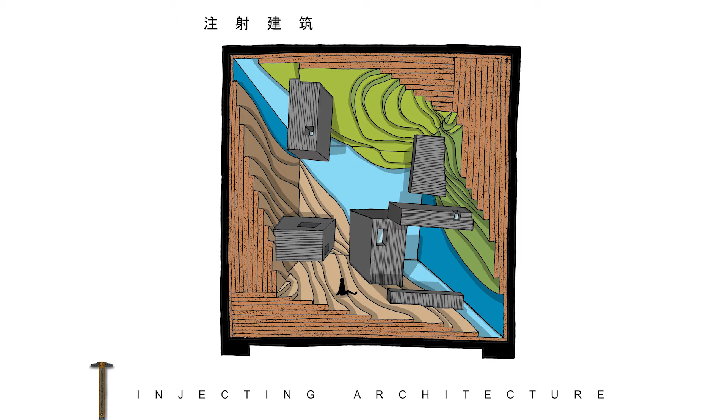This set of things - in fact a few universities are currently in talks with us to have this into their university courses as one of the modules. So I'll just run through it in a quick sense. I'm not trying to do a full 101 on injecting architecture now, just running through it so everyone gets a big picture of what we're going to talk about when we get to the project.

Looking at these two: one is a parasitic move whereby the fish and the isopod - the isopod is actually eating away the tongue of the fish, killing it in the process. And the rhino and the oxpecker - the oxpecker is actually cleaning up the hygiene of the rhino. So this moves from parasitism to symbiosis - that's the direction we're moving.

These are the methods of how forms are created - from birth, from surface, and project. These are quick slides because I won't go into detail.

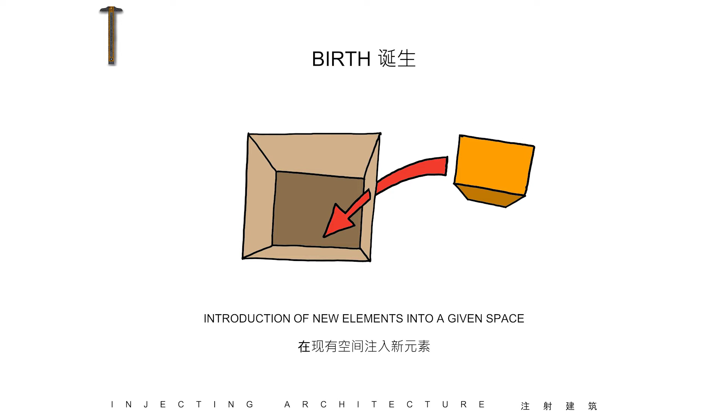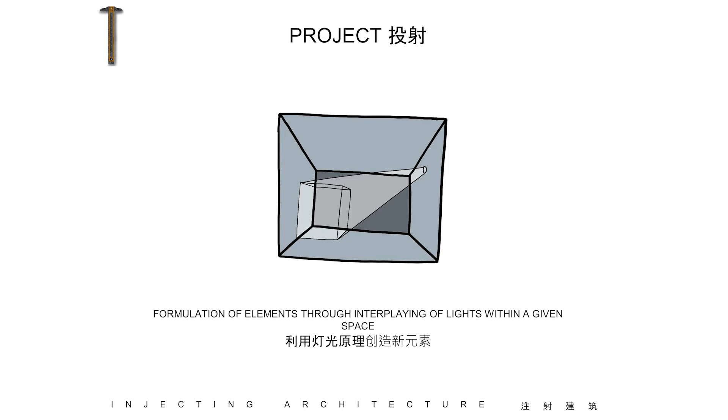Introduction of elements into a given space - that's giving birth, and then formulation of elements using existing surface within a given surface. These are all looking from an interior perspective, and of course the formulation of elements through interplay of lights within a given space.

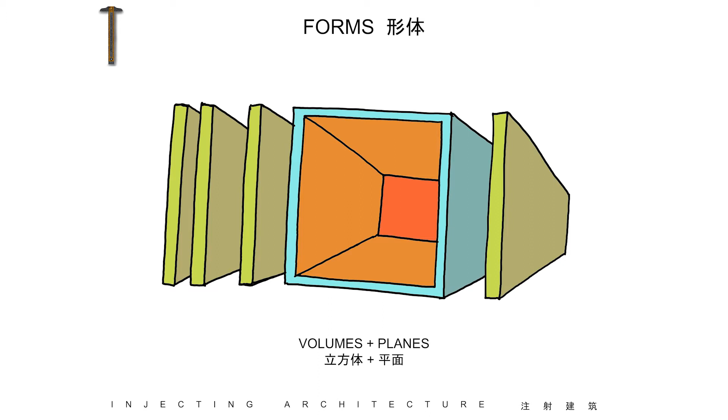These are the ones we're commonly exposed to: forms, volumes and planes, and these are different transparencies. I don't know whether this will bore the professionals, but I'm actually using students as the target since AYDA is for the youth, so do bear with me.

Then there are different kinds - intersection, adjacent, in series, stack, dissect, intertwine, and so on. These are all different methods and it's still expanding, and these are the types of injection methods.

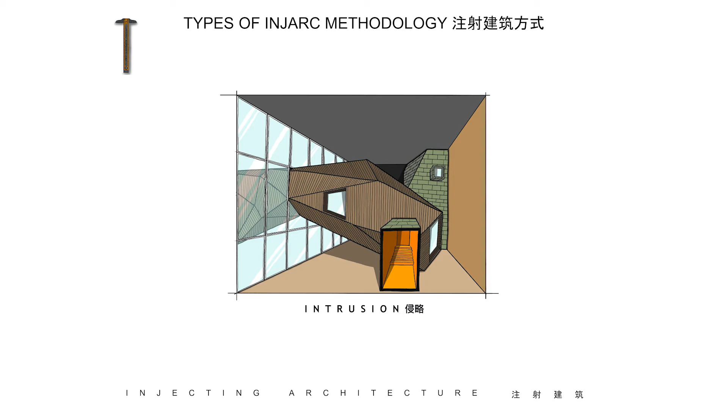Okay, through intrusion, through division, through complementary, through sculptural form, and through fragmentation, and so on. I'm going to the case study because I have very limited time here. Normally my lecture is 1.5 to 2 hours.

In traditional sense, when people look at exhibition design, they're looking at how you display certain things. In fact, even in interior design, a lot of us don't consider that as part of interior because it's more content generation. So these few years, we have been working with another listed company as our partner to try to change certain things in China. In this particular case, we are getting not just the exhibition work as a commission, we are getting the whole interior spaces, including the public spaces, the common spaces, so we integrate everything as one single unit, as one single thought process, rather than to just do them as individual segments.

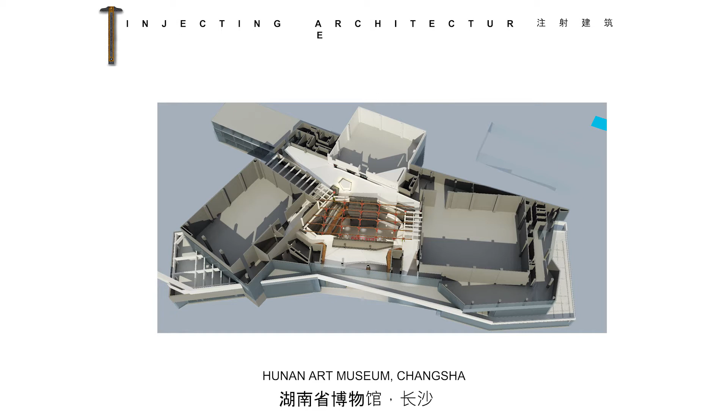So for this, in short, these are the cut-off plan. There are 4 stories to this, so this is just the ground floor. And we can see from the central atrium, those are the skylight area.

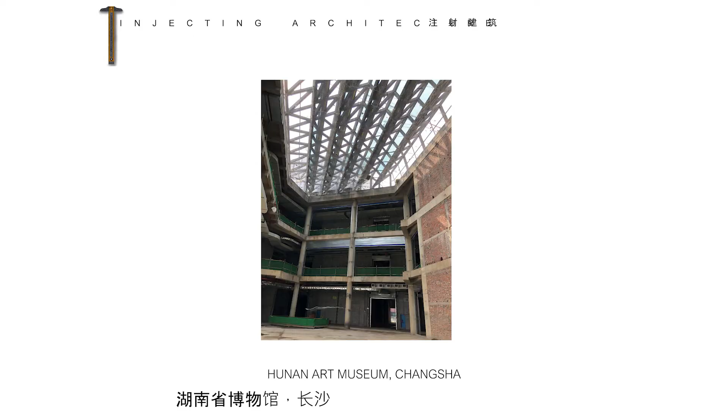In China, the unfortunate thing is that when it's awarded to a lot of local firms, in China it's called Shejiyuan, which is the architecture firm, a lot of them have to rush through the project. So not a lot of thought is given, and a lot of things are left for the interior to actually solve the issue. This is the existing form that was created, and it was quite ugly according to the government. So what we have to do is we got to do everything else, and the architect does have a proposal for this, but it's not satisfactory.

So we take on the whole thing, and in China you have to understand how Chinese work, how the government reacts, how the government works, and how things are selected. This is called guoqing (national conditions). And a lot of this guoqing also involves sentiment with culture. Hunan is one of the richest provinces propagating Chinese culture, called Huxiang Wenhua. And in fact, the whole of China is populated with a lot of Hunan exports, and they're very proud of it. So every project we've gone through in Hunan itself, we have to go through the same process.

So all these are Chinese elements, not because I love Chinese elements, but I think as designers we have to learn to adapt, and we have to regionalize the project that we are doing, not just impose what we like. So in this case, I think we have to put in some of these Chinese elements, but I won't go into detail. So these are, in short, the picture. Those are the Dougong system.

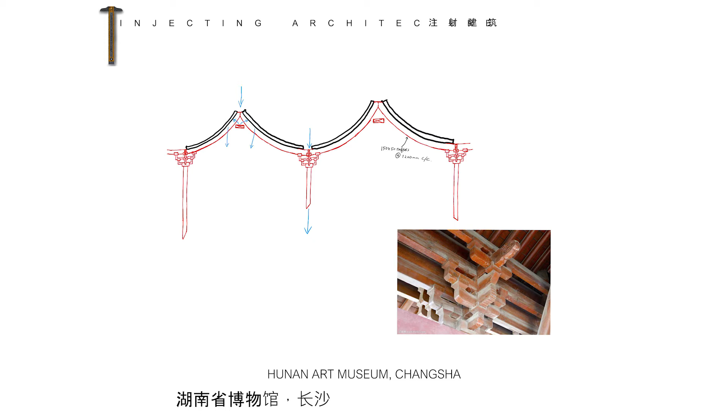So what we did is we reversed it, because this is an art museum. Instead of the Dougong being supported by the columns, and then the Dougong system, and then the rafters, we worked in reverse manner, so that the roof structure itself is holding onto the Dougong, and then to the columns. But these columns now become the light channels, or the straws for skylight into the hall itself, rather than the column supporting the whole entire structure. So in an art museum, we are allowed to really reinvent things. So that was our explanation.

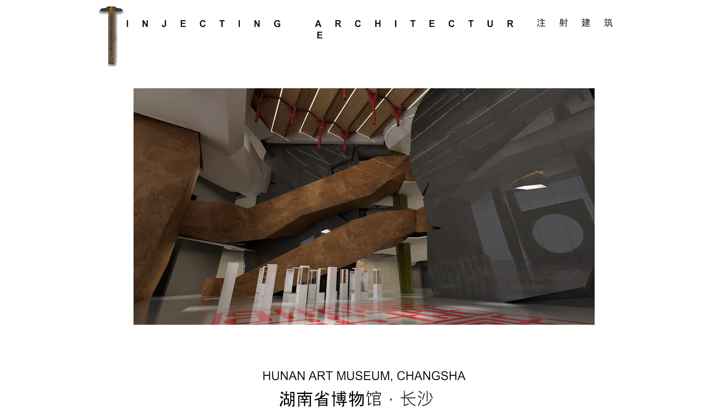So here, as we are injecting some of the elements into a very big empty space, there are a few elements here. This is actually about nature. So the rocks and then the escalator, we have to wrap it with copper. And then on the other side, the wall itself is a glass wall. So those are supposed to be opaque walls that are supposed to block the front of the entry. So we use elements to describe them, so that they have meaning intertwining with each other.

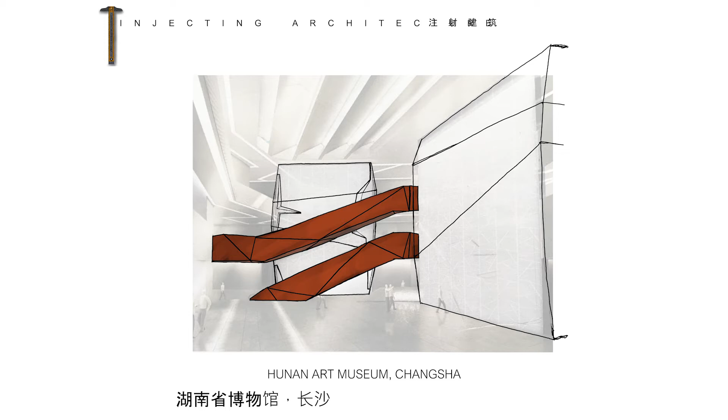From here I think it's more obvious. So the two walls that we have on the front and then the side, we wrap it up with glass. So these are to represent the mountains. And then the escalator is another element. So these are about families, how the families coincide in the environment, in the interior environment.

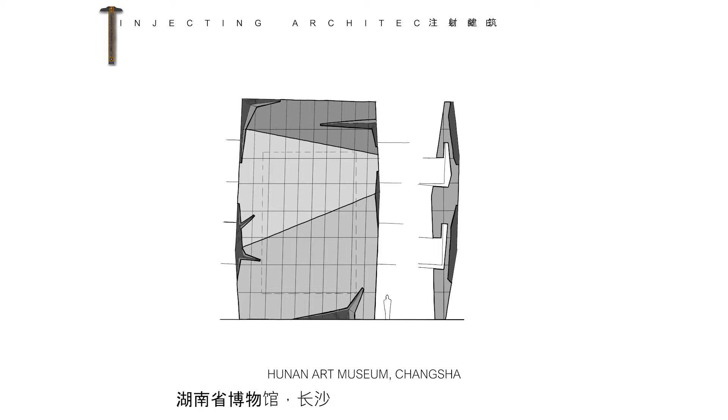And also for museums, right? Whether it's a museum, exhibition center, like our URA center and so on. So these are the ones that are in abundance in China now. A lot of these are created for the VIPs. Who are the VIPs? The VIPs are the government. So a lot of these are activated only a few times a year. So it's unfair because these exhibition centers are supposed to be free for citizens.

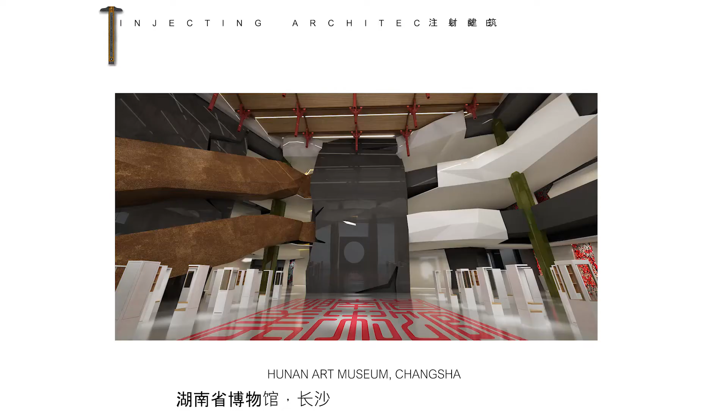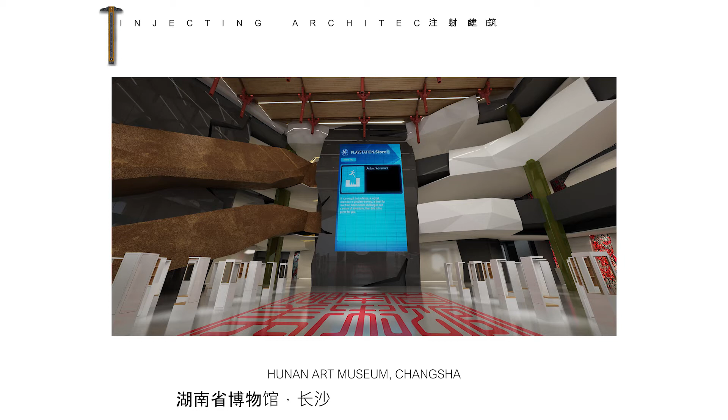A lot of people are seeing the dead form of the exhibit because the LED is not on, nothing is activated, the 3D mapping is not on, only on occasion are these things on. So we proposed to the government that both the dead form and the live form should look nice. In the dead form it will look like a nice sculpture created as a space, and in the live form, these are the LEDs that we were asked to fit in.

We have also implemented a lot of new stuff into museum space, because in architecture or even in ID we realize museum is almost a dead space, because these are spaces that don't generate income, and eventually they have to be renewed in terms of their function. So at this stage where the government is still pumping a lot of money into public spaces like this, we move them ahead and increase the value of the space by implementing commercial elements into the space itself.

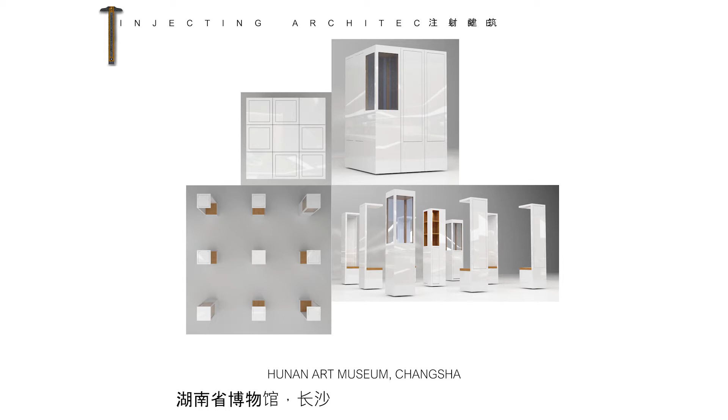So these units sit in the public space, and they are modular, with most units having different functions. The one with glass is a display for cultural items or cultural extension items, such as designer products related to the exhibit itself. Then there's a brochure slot for advertisements, and seats for people to rest. These are public furniture, so we don't need to implement something foreign to the space. This works in conjunction with the whole hall to become an installation itself when inactive.

We were asked to put in elements that are really boring for Hunan, like Juhuashi, meaning chrysanthemum stone, and Xiangxiu, the embroidery, and things like that. I said when all these things get into the space, it's going to be disastrous. So we reinvented the whole thing into a more abstract form, creating a mosaic that reflects the elements. They are still visible to the public and don't take away the meaning, but in a more aesthetically pleasing method.

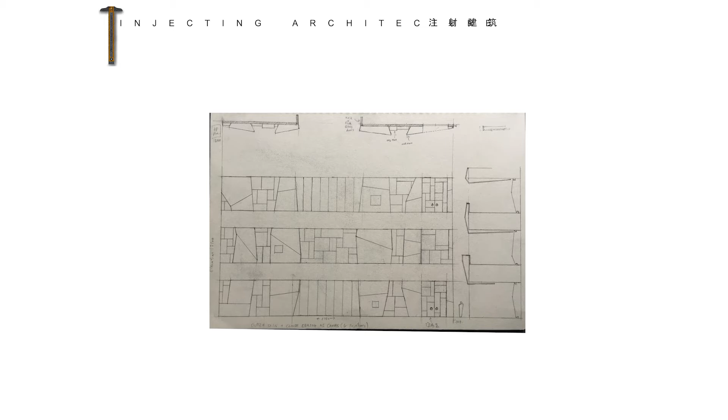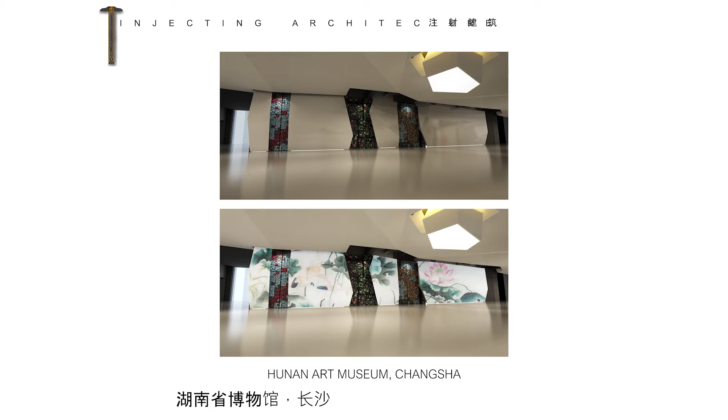These are the outer shell and inner skin we created for all the exhibit walls. When in their dead form, these walls are still sculptural, representing the cloud among the artists. We are promoting all the artists as gods, displaying their items in this whole area. That was the storytelling behind it.

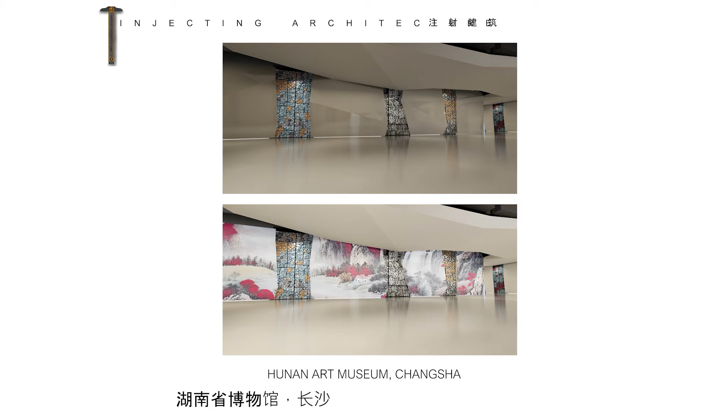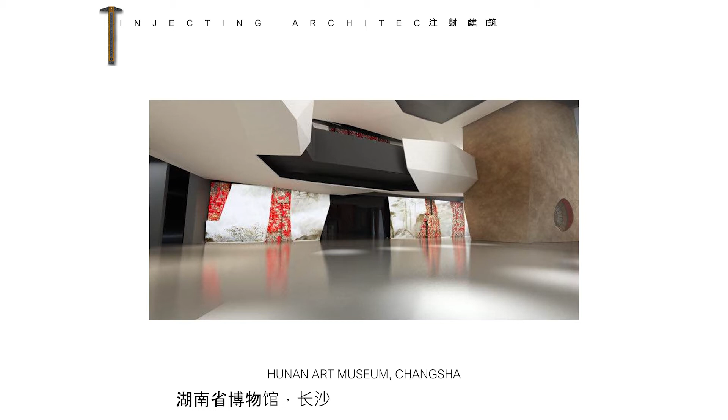Below, we see this when it's active, when the 3D mappings are on. So whether there are a lot of VIPs coming to this hall in a year or not, the public gets to enjoy a full, good aesthetic. These are the other walls, and the cloud actually extends from the wall itself to the balcony. We take away all the glass railing, and these are intertwining families of elements coming together. This is looking at the entrance.

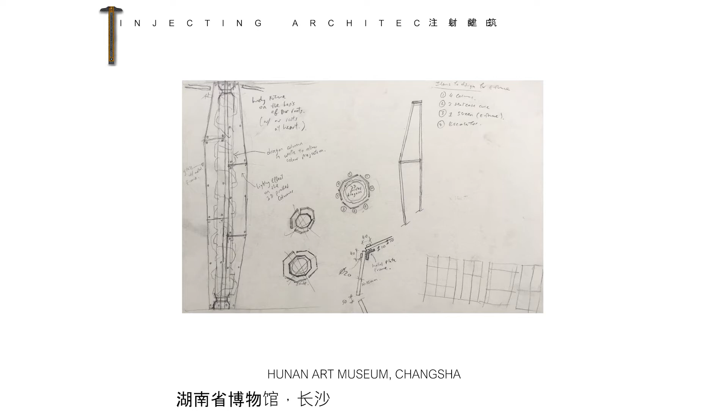Even for one absurd demand from the client, one of the city mayors, asking us to have some cultural elements at the entrance, we were asked for a dragon wrap column. Can you imagine if we were to really put that in the space? So we did two layers: an inner layer with the silhouette of the dragon column, and an outer shell that reflects our architecture and interior architecture language on the outside. Those are opaque glass that change opacity or translucency with lighting, so you'll only see the silhouette, with gaps in between so you could actually see through to the dragon column without it actually being there.

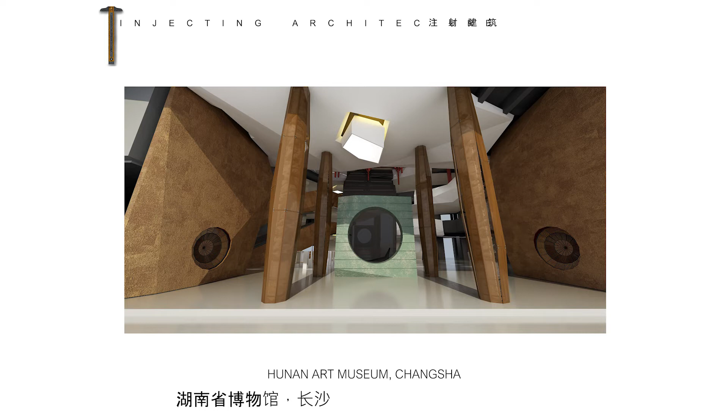So these are the lights. This is the front where we see the column before the light got lit up.

In the exhibition hall itself, we changed some of the function as well, because I always believe in functional aesthetic rather than decorative aesthetic. Looking at the wall itself, these walls are all movable, because for an art museum, we thought about what we can do - you just need a few walls to hang whatever you need to hang, and get the column, get the channel there for the installation. But we didn't want to do it in a very conventional way, and we realized there are also issues with art museums - for example, if you hang an art piece vertically, your frame would have tilted anyway, no matter which part of the artwork you are hanging from.

So what we realize is lighting is an issue. Secondly, viewing point and distance is an issue. So we change some of the angle. None of these are more than 4 degrees, but because of the change in angle, it articulates the whole hall in a different way.

And these are all in standard modular width, on casters and 1 meter thick. So all this wall panel can be shifted to the center to change configuration as we want. And ceiling-wise, we have a common ceiling that runs through the whole hall as articulation, but not just as aesthetic, because those lights in between the ceiling board itself are the general lighting, and then we have the track light on each to focus on the artwork, the ever-changing artwork.

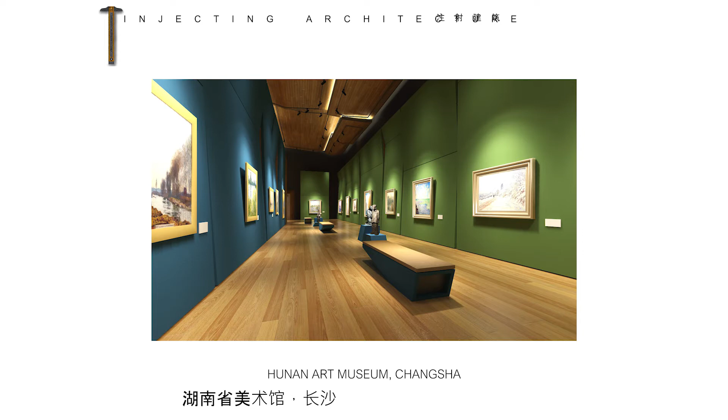Okay, and then we created the store as well. This is not the luncheon meat ham. This is Hunan Art Museum, so it's called HAM. So the HAM store, we use the same concept as well, but in a more commercial way. So this is the entrance to the bookstore and the gift store.

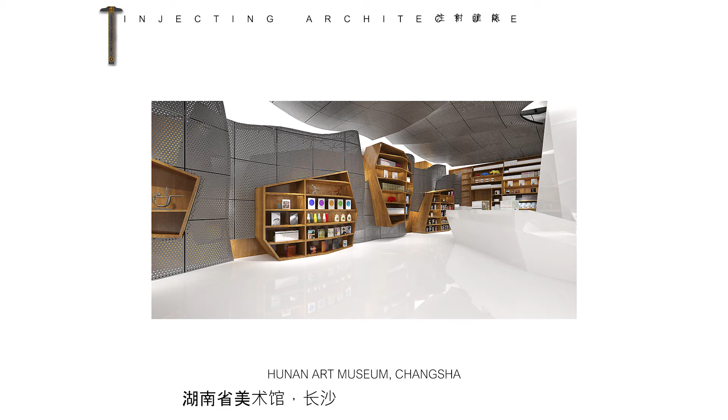And we also change some of the perspective of the government's traditional thinking that you gotta be a miniature of what you are exhibiting, but we said no. This has to be reinvented by another group of designers, in coincide with your exhibit. So these are stores that will sell modern stuff that relates to the exhibit.

So we are using sculpture and painting, the two traditional forms, and abstract them into a space whereby the flowy line represents the painting, and the angular form represents the sculpture. So those forms the shelf itself.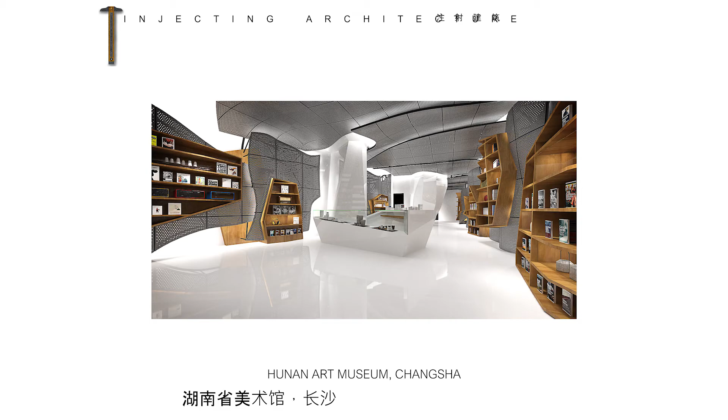Okay, next we have the larger one. This one is interesting because in China there's a lot of material stores, so they sell material, and they are very big - in fact, these are material cities. Each have their own frontage, and a lot of them have not invested on the facade, on the look. They are thinking, if we are selling stone, let's have them all laid out, and if we are selling timber board, let's have them all laid out on the wall as well.

So when the client came to us, this was a project done almost 9 years ago, so we kind of reinvented the scene. This is in Songming itself, and it started from here. Everyone started to do up the facade of a material store. So nobody thought we needed to invest this kind of money to raise our profile, but because of the rising competition, we have to.

Okay, this is a 2-story building, about 2,000 square meters. So they are selling wood items. They started from wood flooring, and then we extended the products to other wood-related products as well, including furniture, wooden doors, and so on.

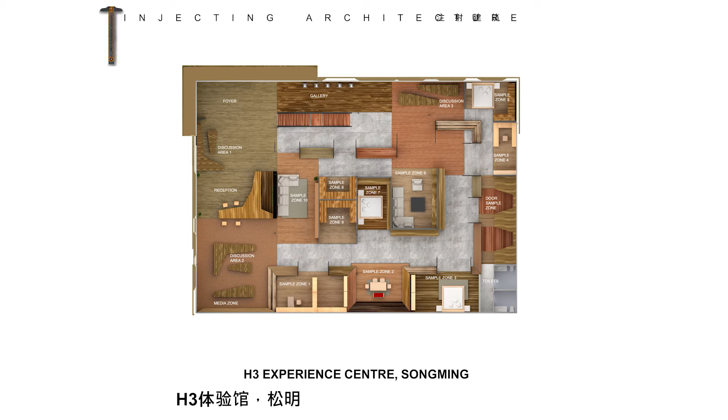Okay, so these are the second story going up, still leading to all these pockets. So these are the things - how we lay out the timber flooring itself, because timber flooring can be quite boring since they are just different shades of wood tone and things like that. And we also articulate the whole facade as well. A lot of the competitors didn't believe in that until we did it and materialized it.

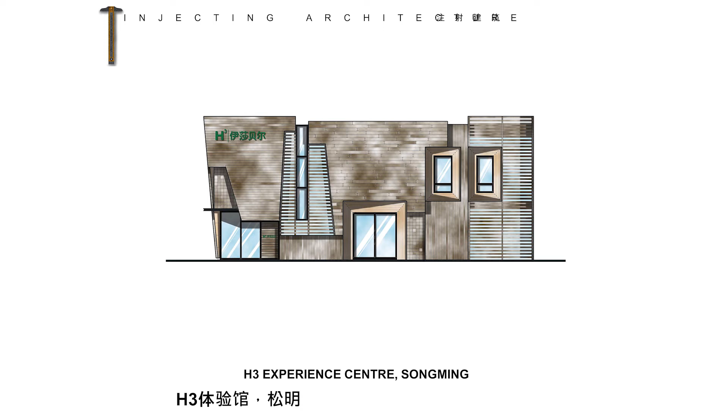So in fact, less is more in this case. So we tell the client that no matter if you want to compare colors or size, scale, or even your logo sizes, you will never beat your competitors - someone will be bigger. So I say, let's go less, let's go to the minimum. So we use one material.

And because the product stands for sustainability, what we did is we used recycled old wood. These are just pine, but some are more than 30 years old, 20 years old. So we got it from the market to do up the facade. So we use articulation by layering the facade itself.

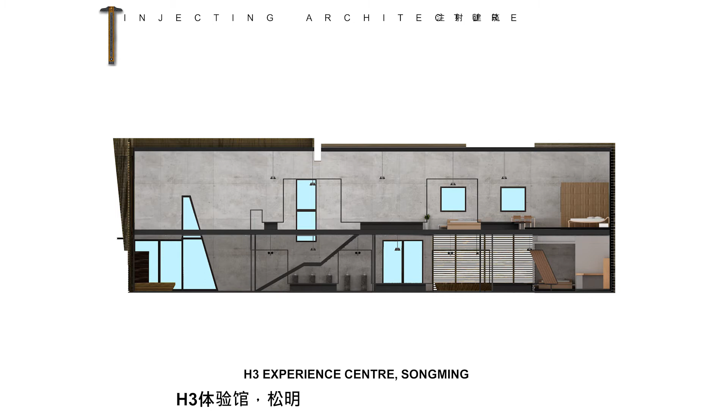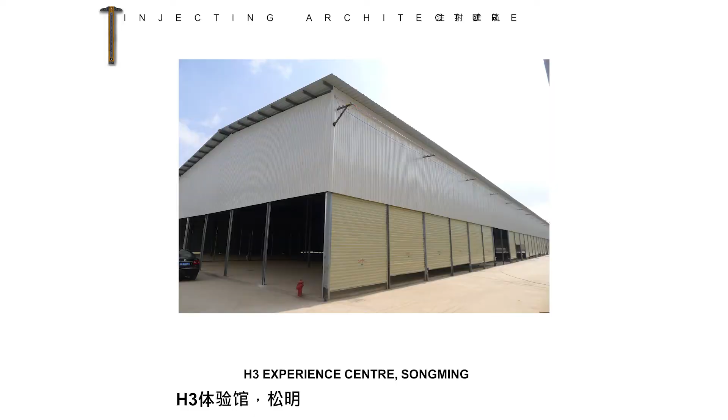This is the entry to Songming. Songming is 1 hour from Kunming, the capital city of Yunnan. So this now becomes the landmark of Songming because it's next to the entrance of the city. Okay, so these are still perspective.

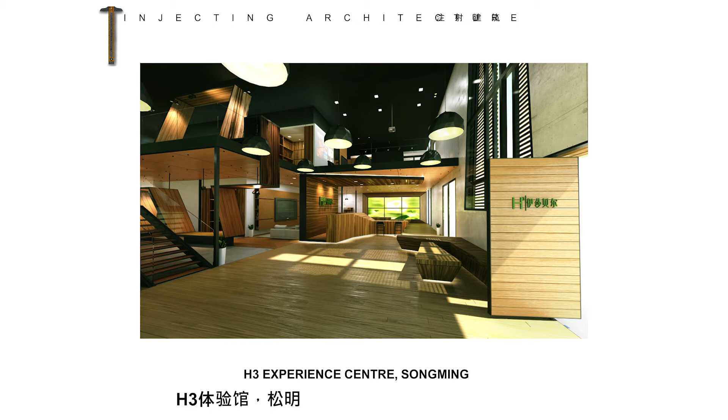So we carried what was from outside language to the inside. For us, because we have an architecture background, we're somehow able to relate, but I'm trying to translate this to the interior design students as well, to really understand the kind of language they were using, and then eventually seeping through to the very last detail. So for example, if you are inside this space, you will not mistake the furniture for sale and the furniture that are part of the building itself. So these are all inner components.

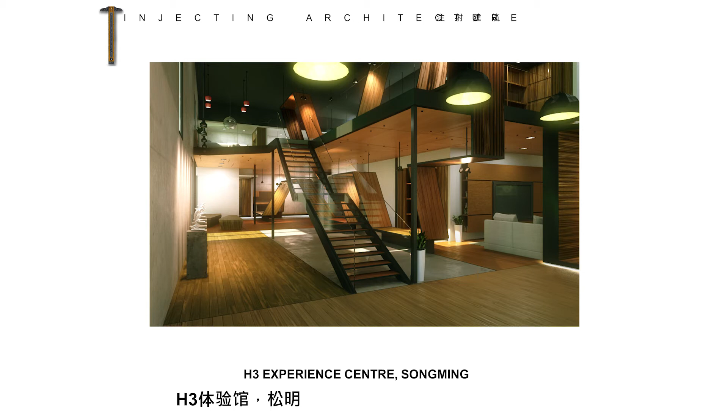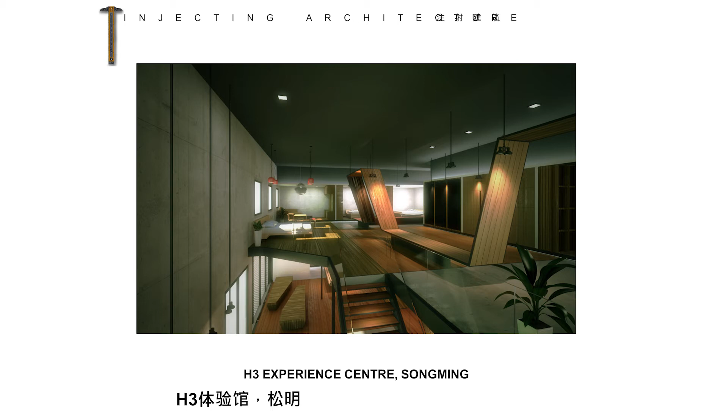So my explanation, my story for this is very simple: the carving started from outside all the way to the inside. So these are the internal carving - in Chinese it's called Nei Diao. That means, have you seen great jade carving, right? With the outside carved and with the internal carve out from the outside. So these are the examples.

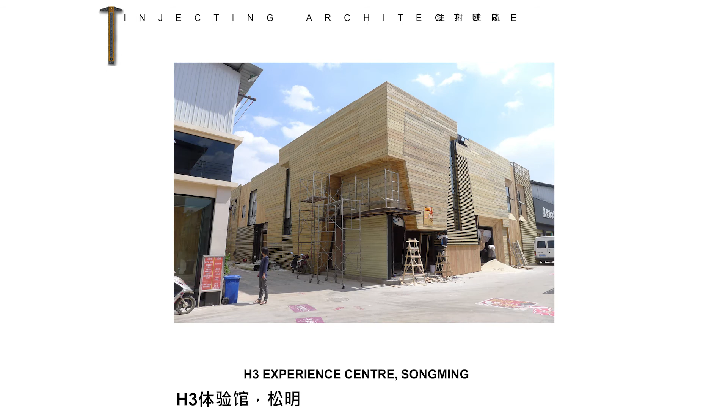Okay, so these are during construction, and this is when it's done. So we use recycled wood so that it's already old - it only ages nicely with time rather than becoming used.

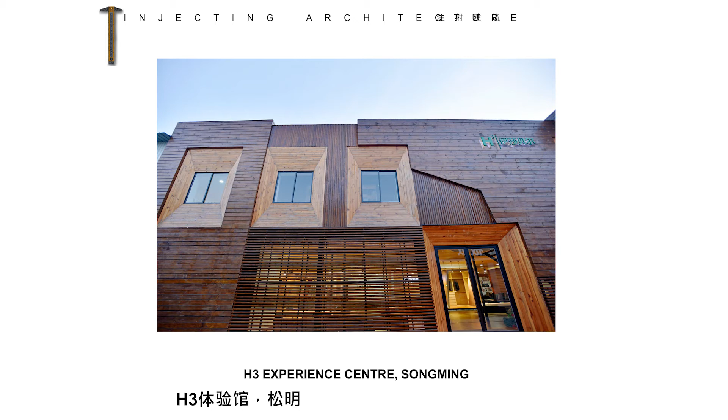So these are from the outside. We have, in fact, from here we could see there are at least 5 different modules to the same material. But eventually we realized this is too expensive, so for our next following project we actually have just 2 modules, just in terms of length and how we place the wood.

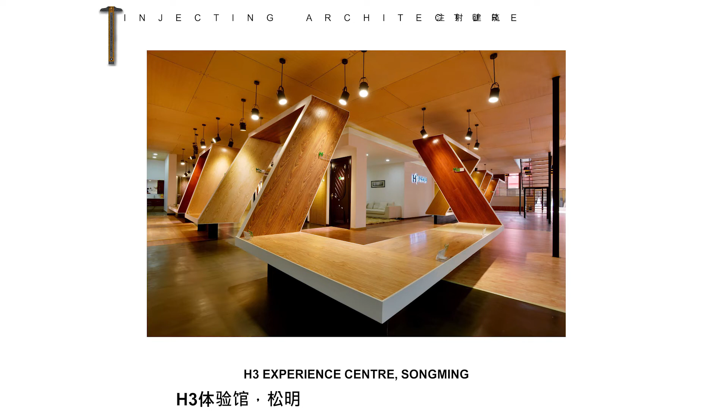Okay, so these are the internal ribbon system that we use to exhibit the different floor materials. In traditional sense, this would have been all laid out on the wall, on panels. In fact, this started a wave for the material market in that area - a lot of people started to revamp their showroom into an experience center. We are, in fact, one of the first to pioneer this, almost 9 to 10 years ago in Yunnan.

And our story to the owner of this sort is that you have to reinvent every one of your stores rather than duplicate like McDonald's or Starbucks, because you are not an international brand. As long as you are still within the province, you are a new brand, even though you are 20 years old, because you have not stepped out of your comfort zone, so nobody knows you. So we told them the only way to propagate yourself is not through the logo, not through how big the size of your logo is, but through the outer form itself and the whole space experience that will give people that memory of your brand.

So you need to evolve from one flagship to another. But of course, I think to us it's good because we get more fees, right? But we tell them that this will last you at least 2 to 3 years, because you have to build up the rapport and build up the memory for your consumer. Okay, so these are the interior.

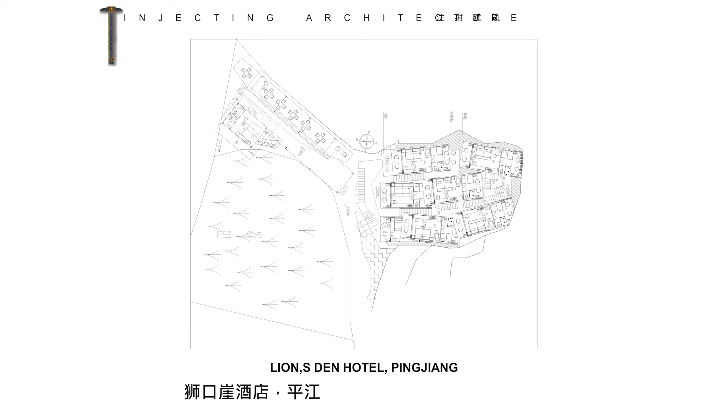So the owner approached me to do a tea house. He said we have 3 more hotel groups in the area, so just do a tea house. I said no, every time I come here I don't have a room, you don't have enough rooms for your whole hotel group. I said I can develop a hotel on this land, but he didn't believe me, he said it's too small. So in the end, we tried.

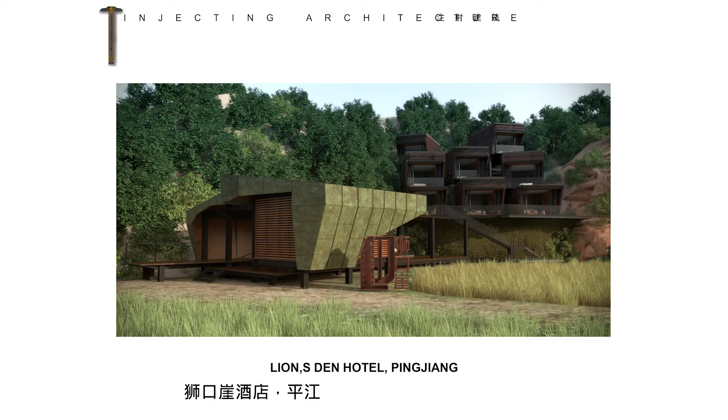So this is the road going in, it's a narrow road. I turned it into a common building as well, what we call the public building. This encompasses the toilet, the small restaurant, and the walkway towards the lodge up there. These are all in different facing directions because each of the scenery is different, with different views right in front.

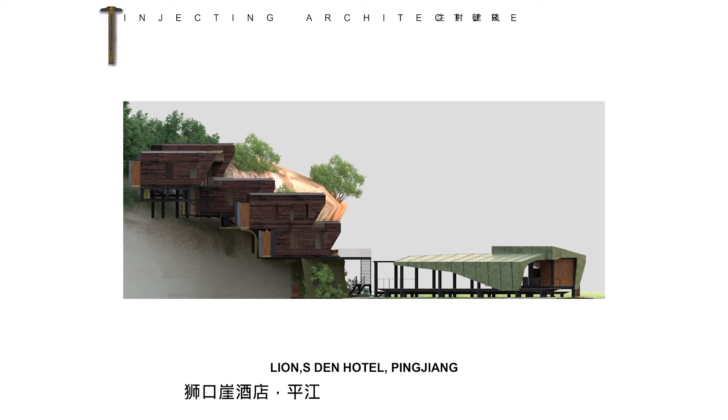Also, because of the psychological effect of tilting the angle of each cabin, we give the end user of each lodge a sense of privacy and an extra sense of security as well.

This is from the section that we can see. So the whole agenda is to touch the land lightly and not destroy what's already there, because we realize a lot of resorts nowadays just build 4 walls in a very nice scenery, so it's destroyed, not engaging with what's out there. So my proposal to them is to be with nature, but protected at the same time.

For example, this public area, this public building, has 3 sections. These are like the traditional style, covered but open at the same time. These are 3 different sections coming together to form a sheltered entity.

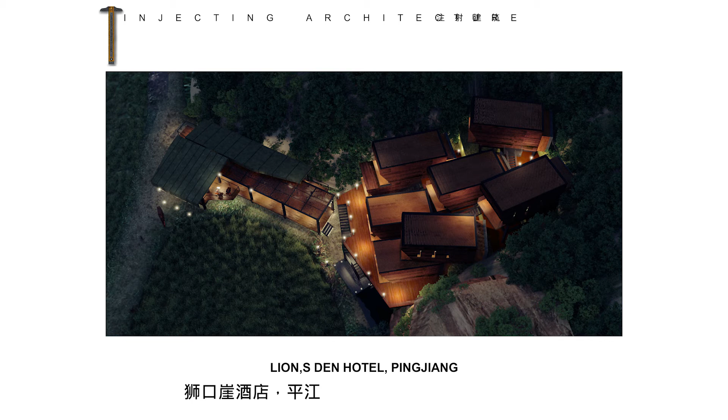From the top, and because of the proximity, we're able to provide lighting through the building itself, through the cabin, through the surrounding common area, the walkways and things like that. We don't need any extra lighting in between, so these are all self-lit cabins. The public building itself is the same, because these are all glass covered, so these are restaurants you can sit in when it's raining or even during winter.

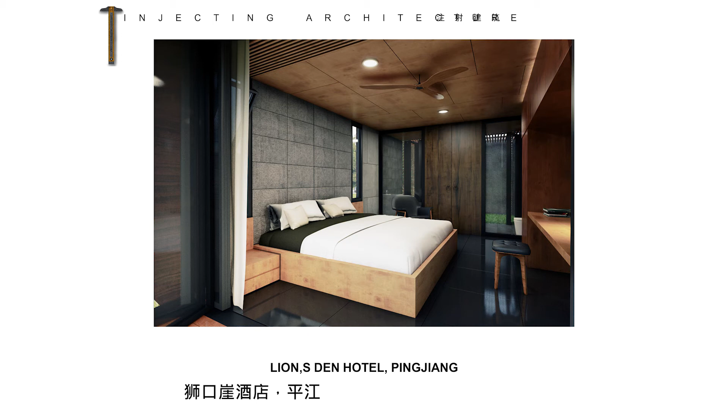These are all looking through the bedroom to the scenery in front. This is looking from the front, and the beds are all separable, so they can be one big king size, or split into two, since there are only 8 cabins there.

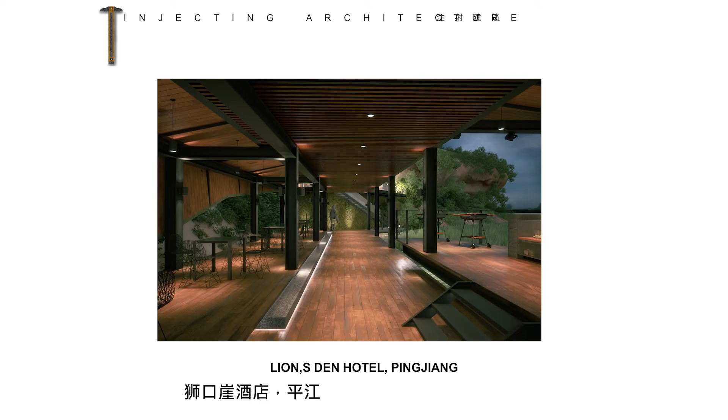These are another side of the toilet where we are exposed to nature, and we use a double layer louver system so you could have daylight and sunlight coming in without sacrificing privacy from above.

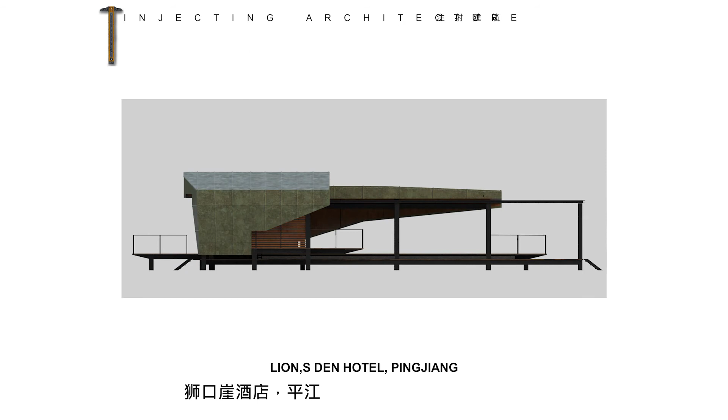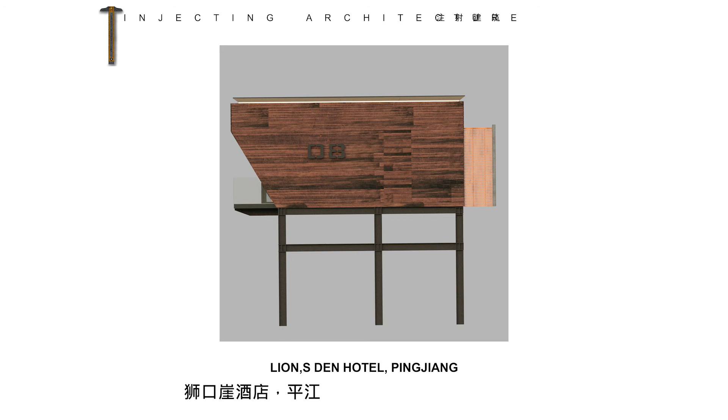These are the public building site, a walk around of it. We redesigned the whole logo because the building footprint is so small, so we made the logo viewable from at least a few kilometers apart. These are the cabins.

This is during construction. It will be ready by this month, and we're already booked for 2 movie productions, they're going to use this as one of their backdrops.

This is from the top looking down. For normal architecture we have at least 4 sides exposed, and now people are emphasizing the roof as the 5th facade as well. But this one is almost 6 sides complete, because from the lower cabin, the bottom of the building has to be completed too, so there are no exposed areas left untreated.

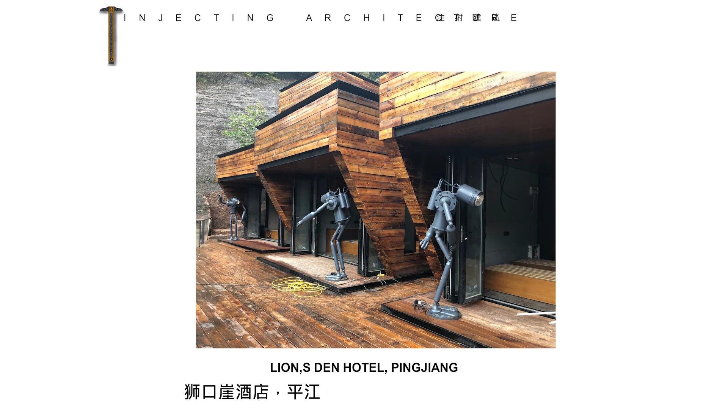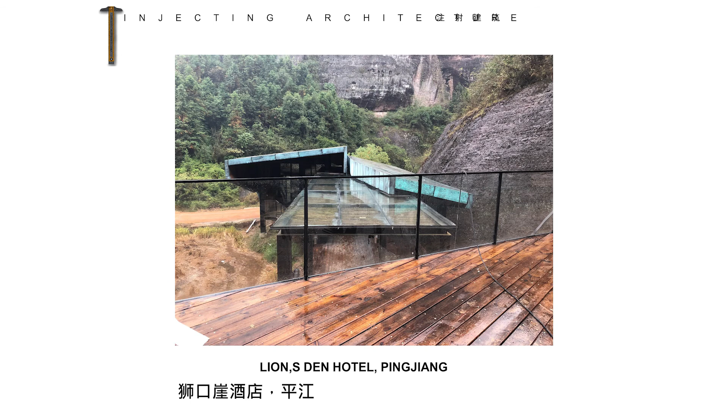These are from a different angle. It's very tight, you can see from the 2 cabins. These are the common side, but the windows are all front facing, the side windows are just for ventilation. Okay, lastly to the small.

Okay, this one is in Orchard Central, but this was done 11 or 12 years ago. So this is no longer there. In case you want to check it out, it's gone.

This was by one of the subsidiaries of Singapore Airlines, an SIA subsidiary venturing into F&B. This is called Jewels Artisan Chocolate. What they wanted to do is sell very expensive chocolate, more expensive than coffee itself. So we were thinking, how do we sell this and how do we market this in the first place?

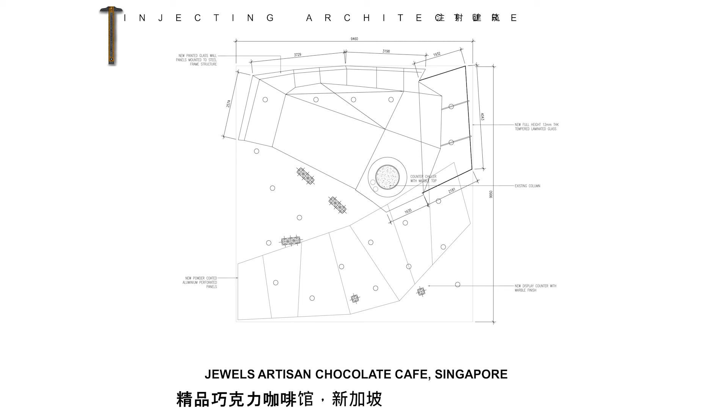What we did is reinvent the space for them. But again, we were given a site trapped in between. This is the floor plan. Behind here is a toilet, and these are all alleyways - toilet, two F&B outlets beside, and the escalator up and down from here. So we are trapped in between.

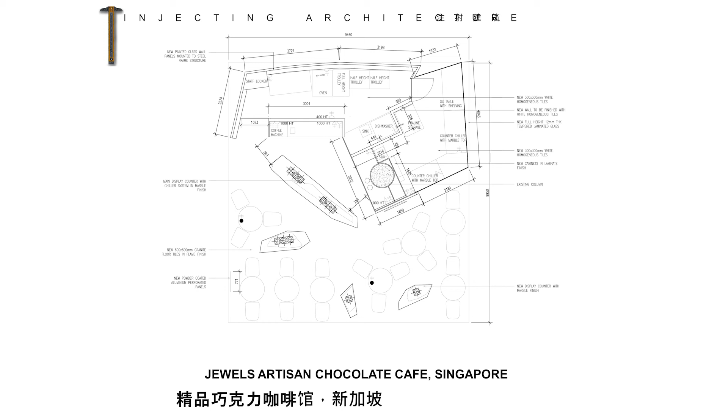So 11 or 12 years ago, we were given this brief. I think they are still quite strict with facility management - we were asked to just wall it up with glass. They said if you want transparency, that's all you do. But we were not happy. We said we want to do something different, and we needed this to not have a frontage, but to make it all one overall sculpture sitting right in the middle of Orchard Central.

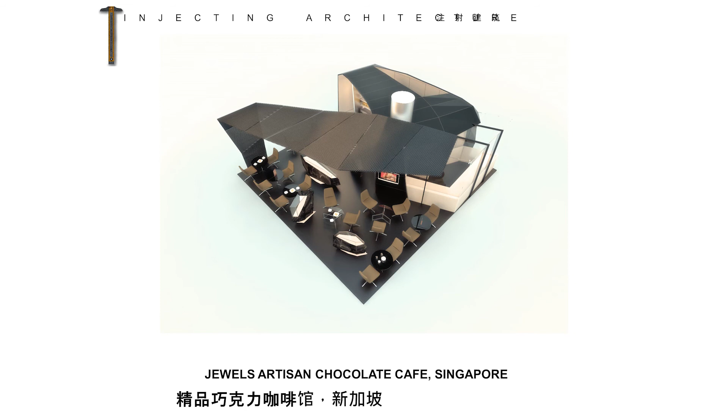So that's what we did - we created an opaque side, which happens to be the kitchen, and then the exposed side, which is the seating, facing the escalator. Then we have a side with a showcase. So we don't want an exact front and back. In fact, on the toilet side, we managed to use the kitchen to cover it up, using a half rock formation.

Land rental is very expensive in Singapore, so we need to possess the space. What we did is we were also not willing to sacrifice any inch that belongs to us. By not having the glass wall, we needed something to repossess the space again - so the roof is what we did. We had a roof over our existing one to cover our boundary from the airspace itself.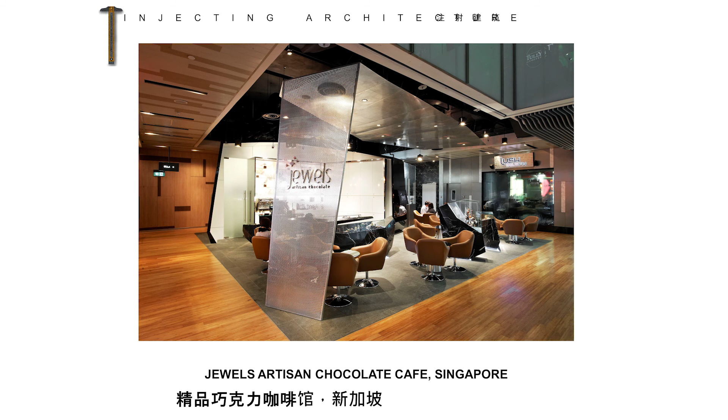These are the sculptures we did as an extension to the big rock behind, which is the kitchen, to display installation art created with the very expensive chocolates. This is the back facing the toilet. You can see from the boundary - this is our boundary - so it's still very clear where the public area is and where the store area is.

We want to propagate original items entering the house now. A lot of us are very familiar with IP on other stuff, but not with decorative pieces in the house. So what we are doing now is trying to propagate that, and also to collaborate with artists with original artwork and designers. In fact, a lot of art is now done by designers entering the house to replace our traditional cheap decoration - that will be the new form we are trying to push for at this moment.